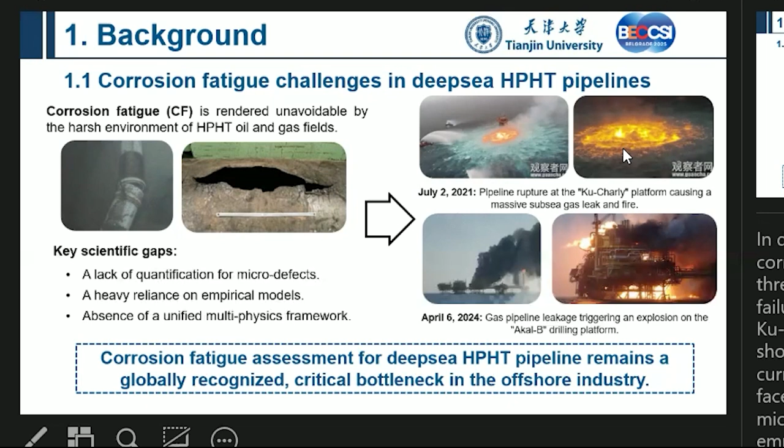So you can take a look here, 2021 and even 2024, one year ago, we had a big accident in the ocean area. You can see this is always due to the corrosion fatigue problem.

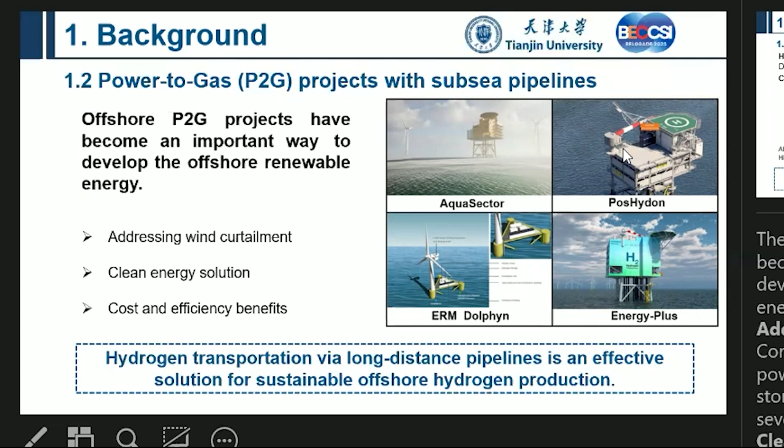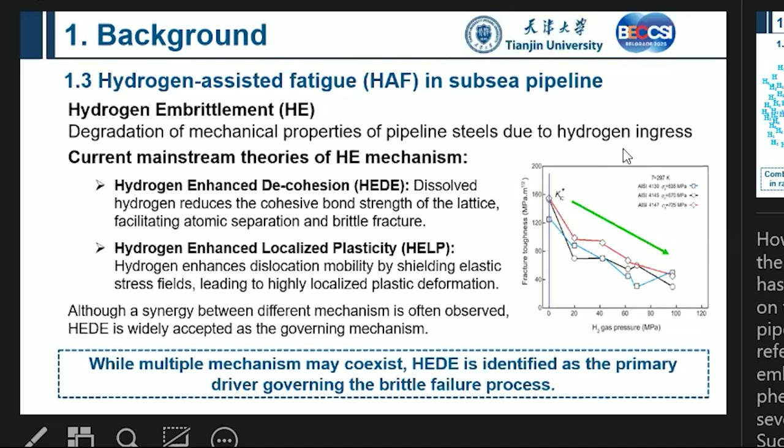Actually, when I was working in the industry a long time ago, in 2013, a very famous oil and gas company called BP, British Petroleum, had a lot of deep sea pipelines. The design life is 30 years. But due to the corrosion fatigue problem, many pipelines had leaks after only 4 or 5 years. So that's terrible.

At that time I was working for ABS, the American Bureau of Shipping, in Houston, and they sent this accident to our company, and we didn't know how to deal with it. So in 2013, ExxonMobil, GE Oil and Gas, my company and WOM established a committee for the 20 KSI qualification. I was one of the members at the time. So this is a very important problem for our industry.

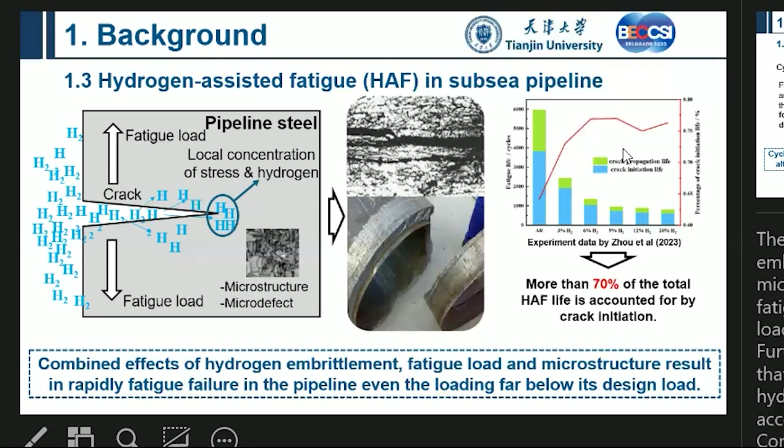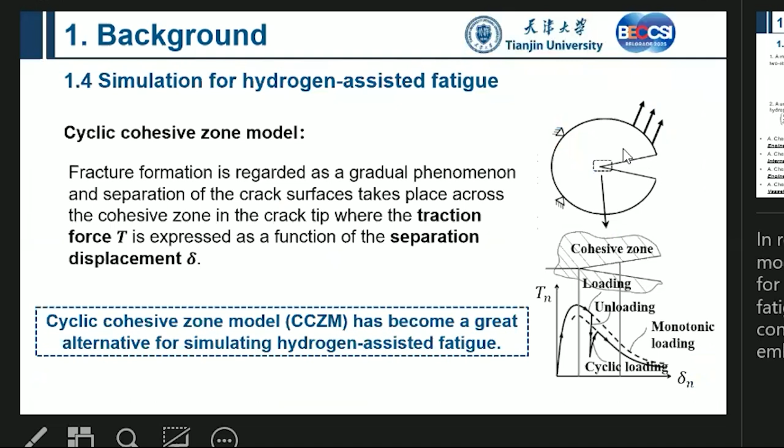And also we all know the initiation life is very important, maybe more than 70% of the fatigue life, much more important than the propagation. In this presentation, I would like to introduce how we use the cohesive zone model to predict the hydrogen problem. I'll just quickly go through some work.

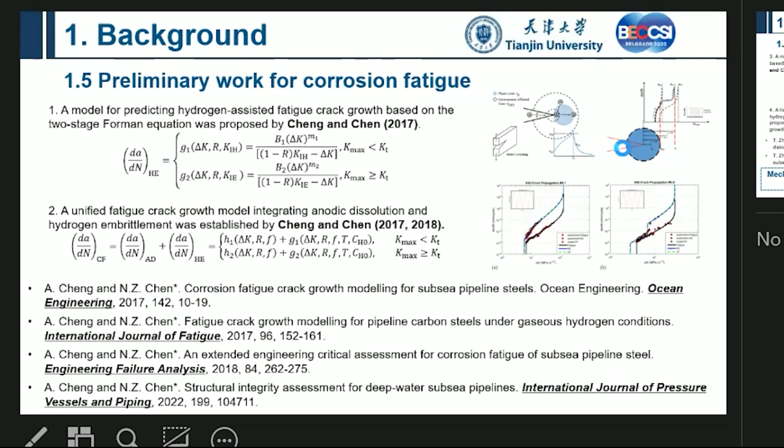In 2017, my PhD student Cheng and I proposed a two-stage Forman equation for predicting hydrogen-assisted crack growth. In 2017 and 2018, we proposed another model, including anodic dissolution. These are some of our papers at the time. In 2023, we developed the cohesive zone model to predict hydrogen-assisted crack growth. And this is our model.

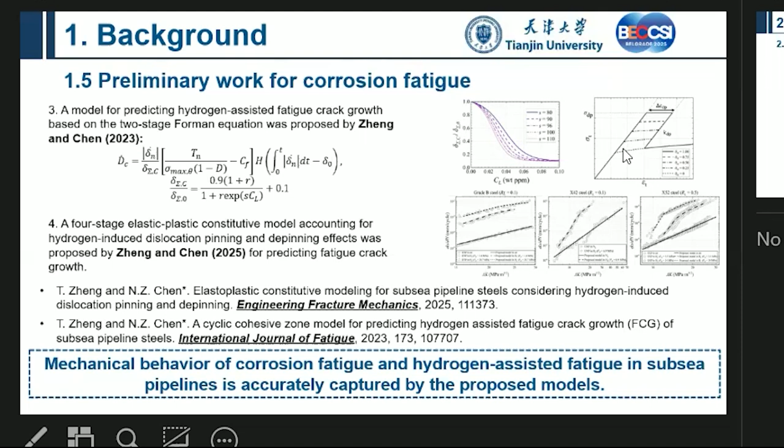Just this year, we also proposed a four-stage elastic-plastic constitutive model accounting for hydrogen-induced dislocation pinning and depinning effects, just published in a paper. In this presentation, I would like to introduce some defects. And the defects are here.

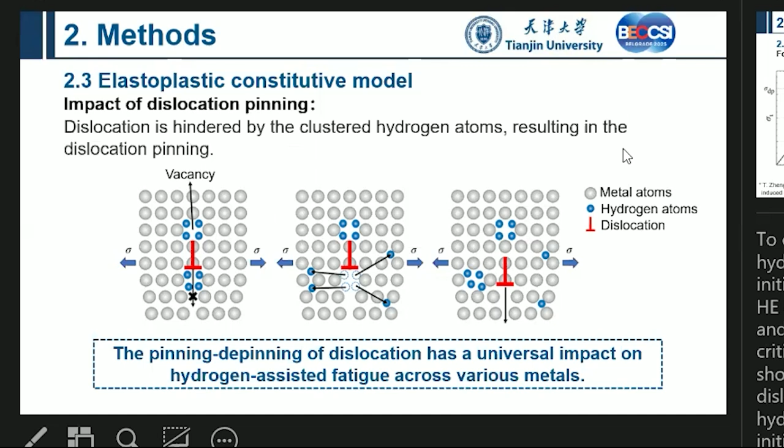I would like to introduce some defects, because for example the material is not normal. Micro defects will be described as a semicircular area, whereas the density of the hydrogen trap will be set up different from the normal area. For example, the density of the trap, we would like to set for defects, would like KNT multiplied by NT0. This is our idea, just like replacing something.

We also would like to introduce the defects. For example, here we have defects, and we have another defect maybe nearby, and we see how this defect will influence this one.

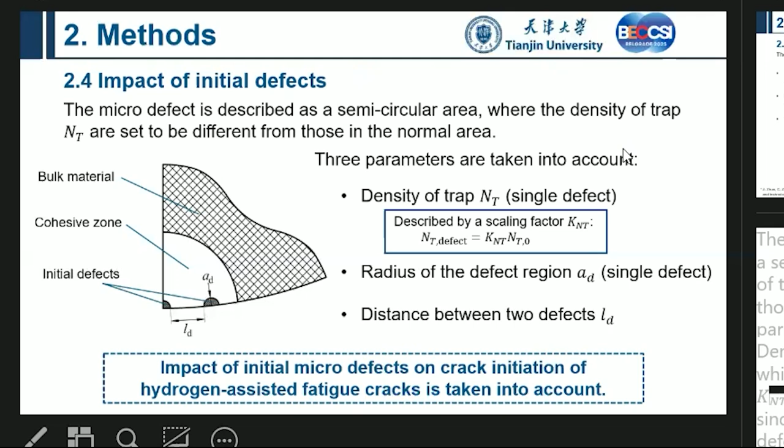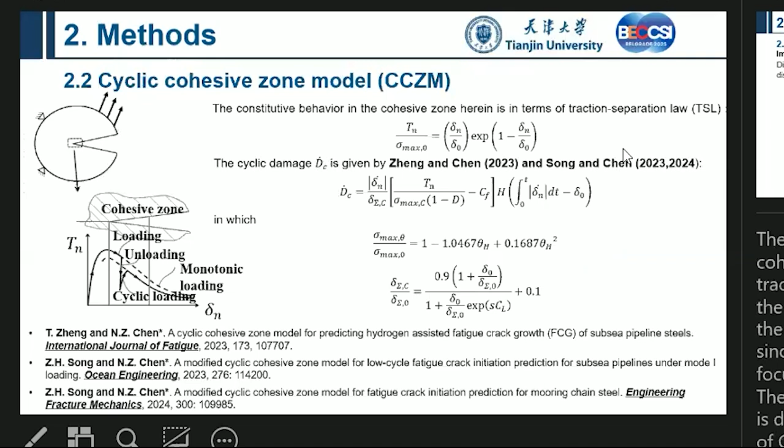We just use the diffusion equation, which is very typical, and we also use the constitutive model we proposed in 2023 and 2024. We developed some models this year, and also applied the four-stage elastic-plastic constitutive model in this work.

This constitutive equation is composed of four stages. The first stage is pinning hardening, the second is plateau, then depinning, and then depinning hardening. We use this model here.

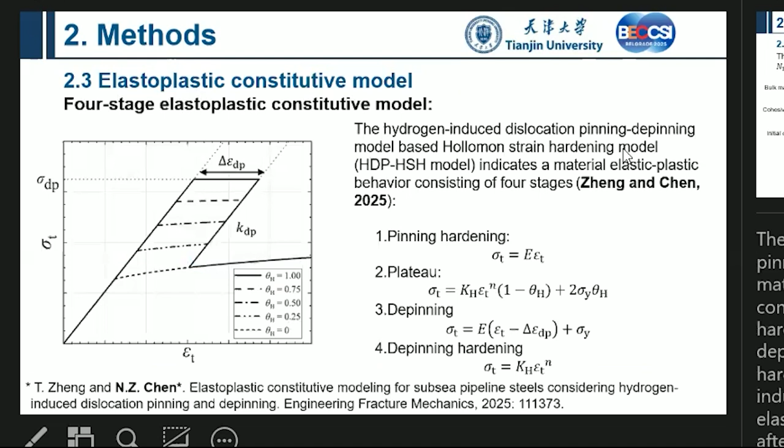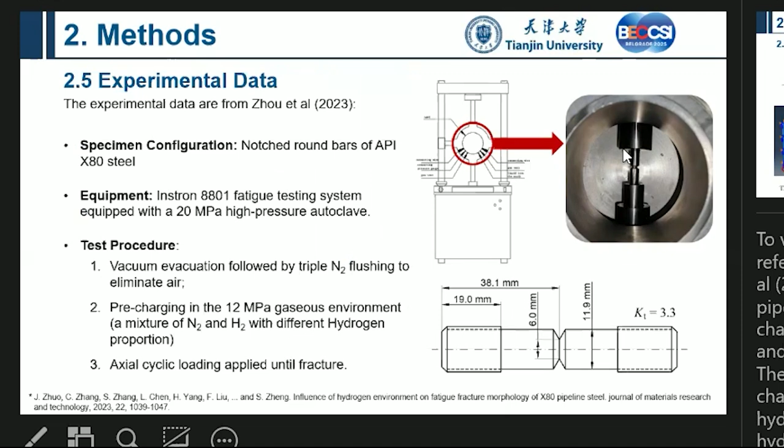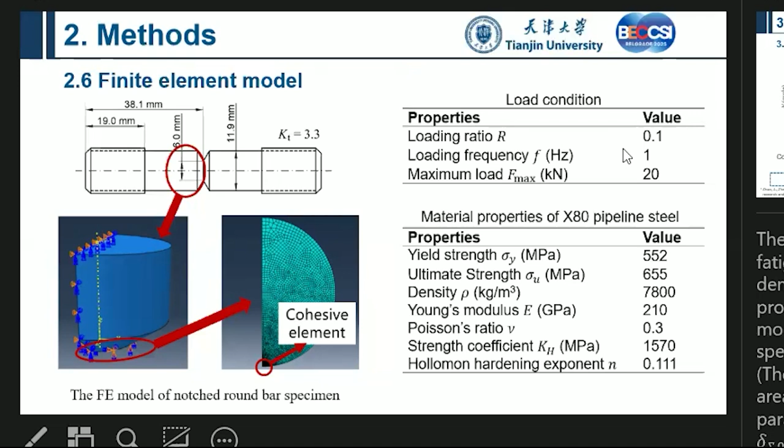We first compare the experimental data, performed by Zhou in 2023. This is the experimental model, the loading condition, and the material properties. And this is our finite element model, where we put a cohesive element here.

Let's take a look at the results - the relative error between the model prediction and the experimental data. Looking at this table, the maximum relative error is only about 16 percent, so it still looks good. The model prediction is in general good agreement with the experimental data.

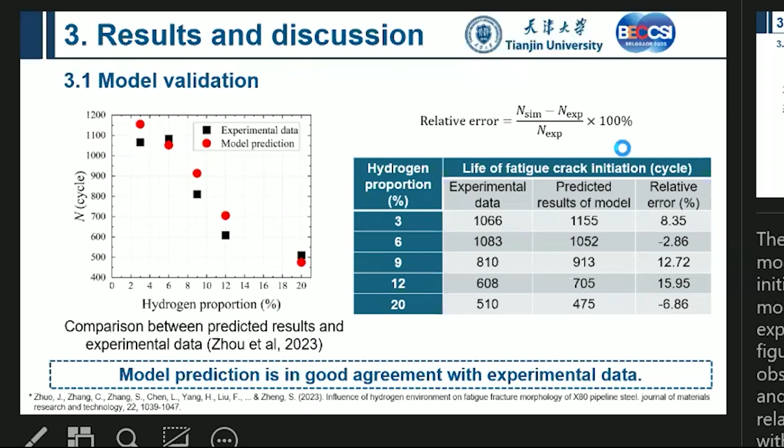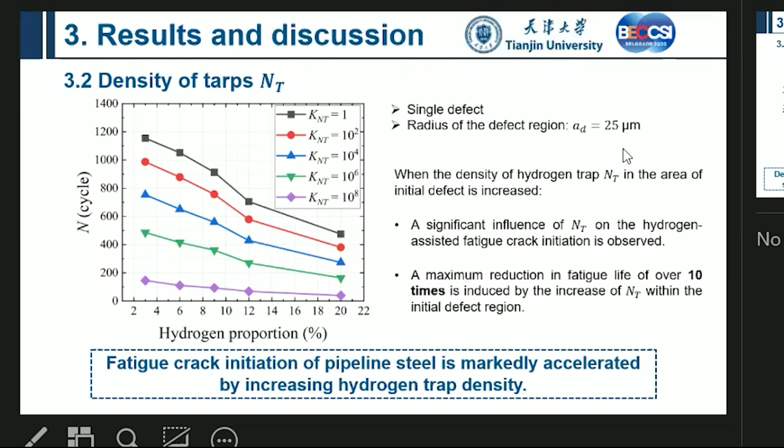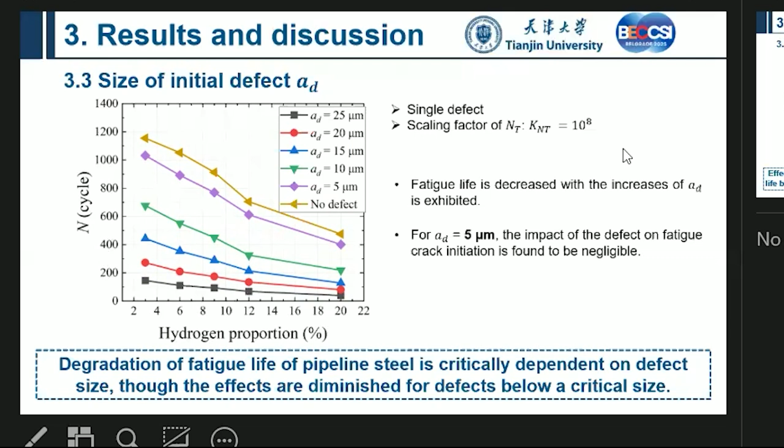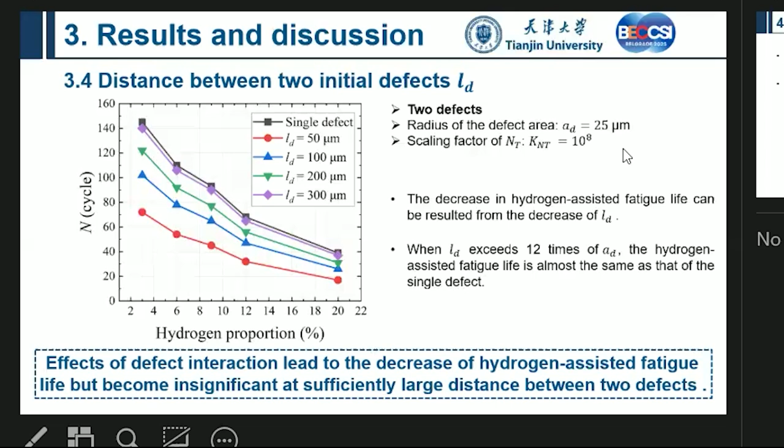Then we look at how a second defect influences the initial defect. For example, the more closely positioned, the more influence. Here, this one is only 50 μm apart, but this one is 300 μm apart. So when very far apart, it's more or less like a single defect effect.

So we come to the conclusion here: the hydrogen-assisted fatigue crack initiation of pipeline steel predicted by the proposed model agrees well with the experimental data. Also, initial defects have a significant impact on the initiation of hydrogen-assisted fatigue cracks in pipeline steel.

Fatigue crack initiation of pipeline steel will be markedly accelerated by the increase of hydrogen trap density in the initial defect region. Second, the degradation of fatigue life critically depends on the defect size - the effect can be negligible for defects below a critical size. Effects of defect interaction lead to a decrease in hydrogen-assisted fatigue life, but they become insignificant at a sufficiently large distance between the two defects.